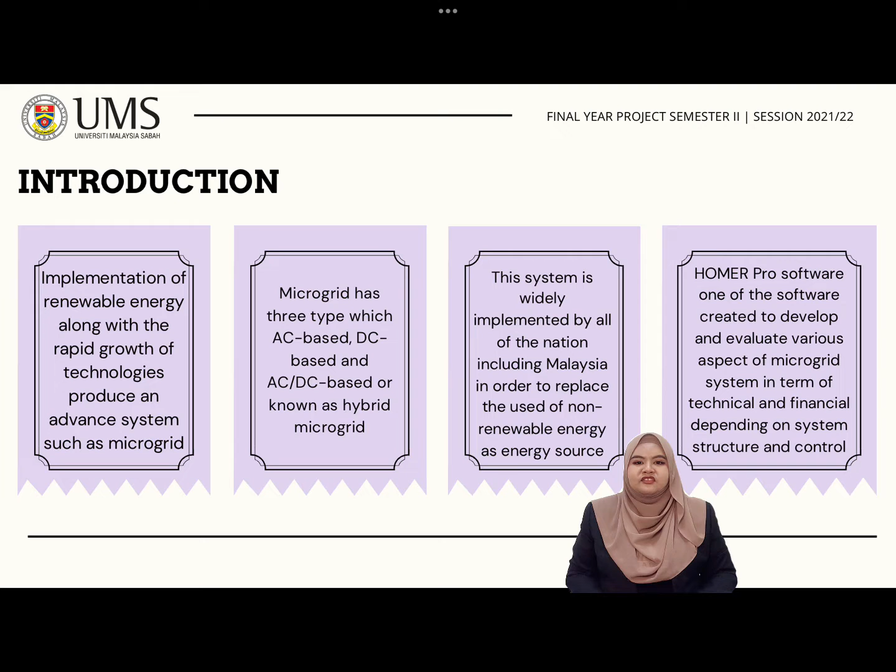HOMER Pro software is one of the software created by scientists to be used in developing and evaluating various aspects of a microgrid system in terms of financial and technical, depending on the system structure and control. The problem statement for this project is that the implementation of renewable energy such as solar, wind and biomass along with distributed energy devices is currently applied in numerous developing countries in order to replace current sources of electricity distribution. Since the microgrid is a self-contained electrical supply, this system is a popular topic discussed among scientists around the world.

The implementation can give benefits in terms of conservation of the environment and at the same time can reduce the maximum demand. For this project, the research location is at the Faculty of Medicine and Health Science, Universiti Malaysia Sabah. This study is purposely to investigate the possibility of implementing a hybrid microgrid system at the faculty, and if it is possible, what is the best fit configuration that can be applied.

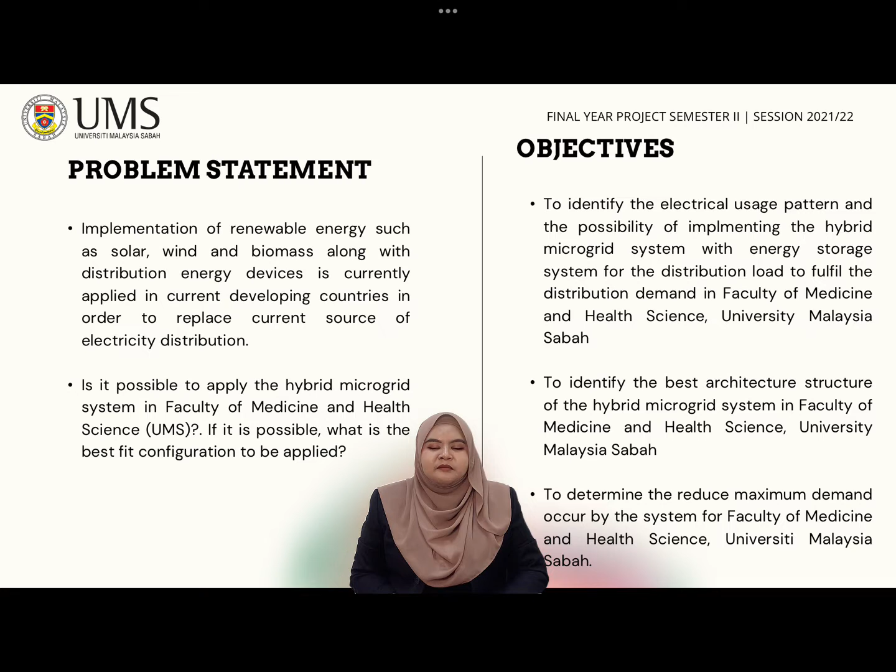The objectives for this project are, first, to identify the electrical usage pattern and possibility of implementing the hybrid microgrid system with energy storage system (ESS) for the distribution load to fulfill the electricity demand in the faculty. Secondly, to identify the best architecture structure of the hybrid system in the faculty. And lastly, to determine the reduced maximum demand achieved by the system for the faculty.

The literature review presents the overview of the research made in this project. As stated in the title, a framework is described as a basic structure underlying a system, concept or text. Thus, modeling a framework of a hybrid microgrid system is defined as constructing a connection configuration of the system with distributed energy resource units and devices. Other than that, an energy storage system is known as a device that functions to store the energy produced from renewable energy by another device.

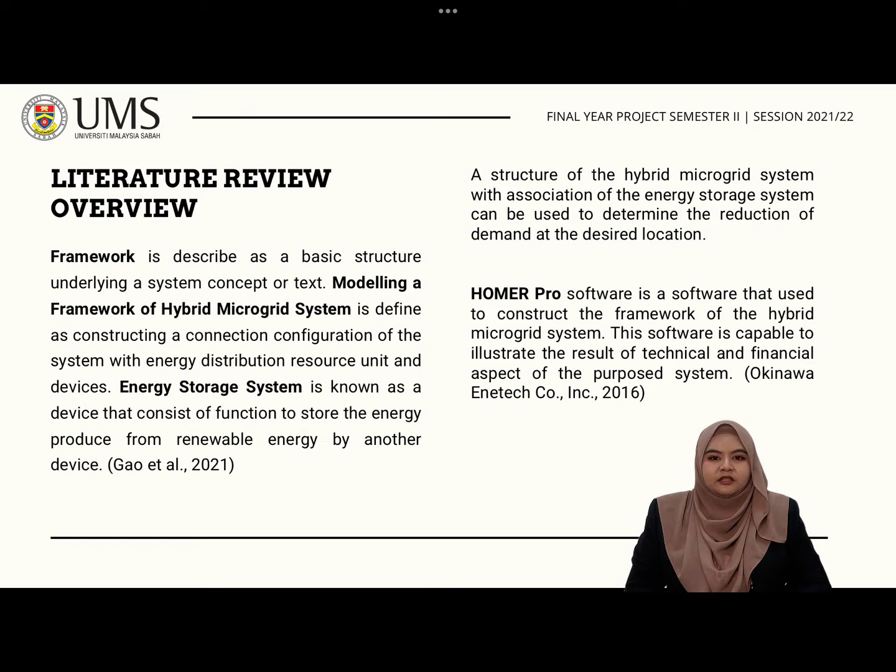Moreover, a structure of hybrid microgrid system in association with the energy storage system can be used to determine the reduction of demand at the desired location. In addition, HOMER Pro software is used to construct the framework of the system; this software is capable of illustrating the results from the simulation of the configuration in terms of technical and financial aspects of the designed system. Furthermore, maximum demand is defined as the highest level of electrical demand monitored in a particular period, usually a month. According to Tenaga Nasional Berhad, the higher the maximum demand, the higher the electricity bill charge.

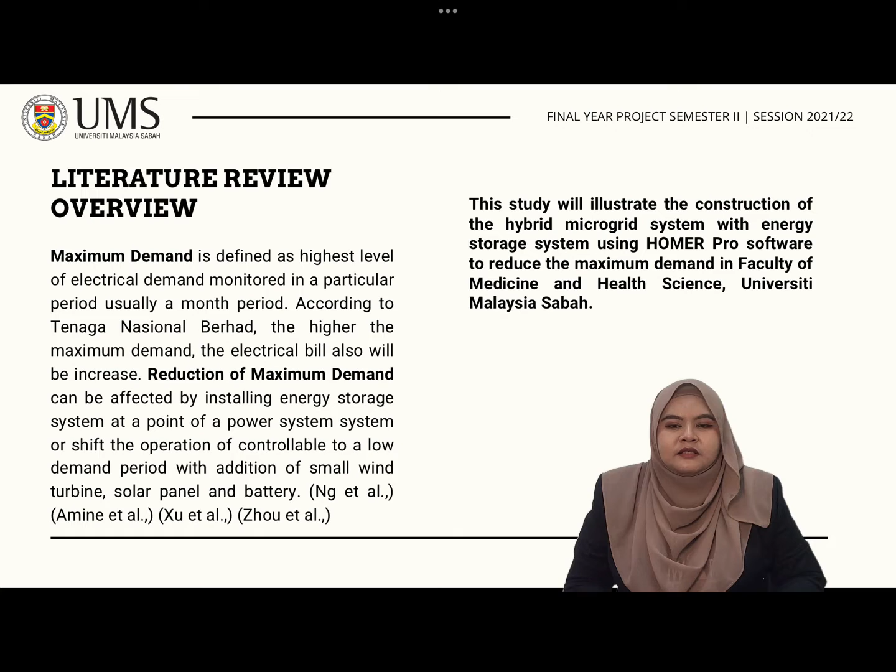Thus, the reduction of maximum demand can be achieved by installing an energy storage system at a point of the power system, or totally shifting the operation of controllable loads to a low demand period, with the addition of a small wind turbine, solar panel and battery as energy storage system. Hence, this study will illustrate the construction of the hybrid microgrid system with energy storage system using HOMER Pro software to reduce the maximum demand in the Faculty of Medicine and Health Science, Universiti Malaysia Sabah.

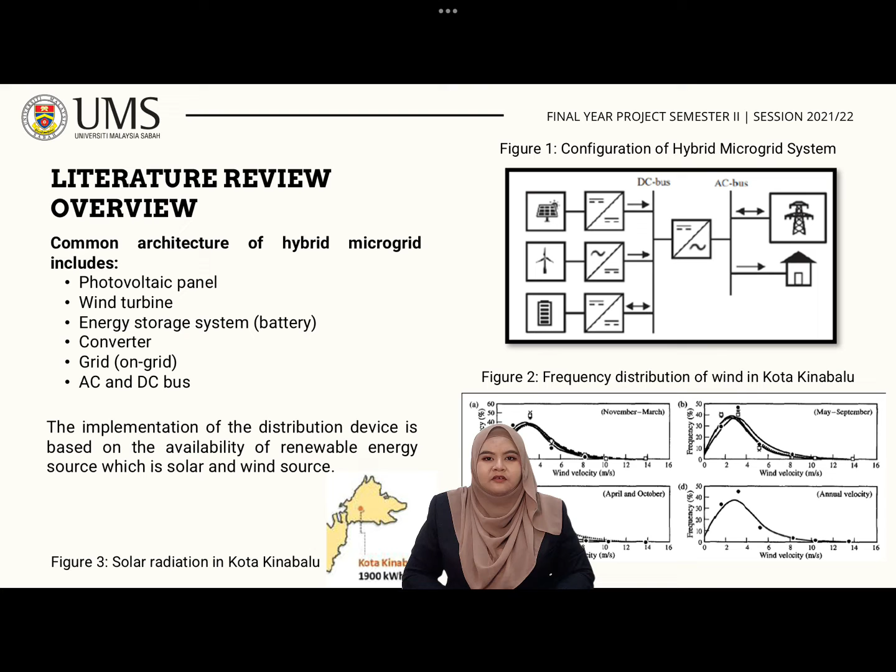For data collection, there are two sources of data: SESB, or Sabah Electricity Sdn Berhad, and the Faculty of Medicine and Health Science in Universiti Malaysia Sabah. The data gathered is in terms of the existing system in Sabah and electricity usage by the faculty to determine the pattern of usage. To collect this data, several site visits have been made to the faculty to take readings of the load usage using a data logger device.

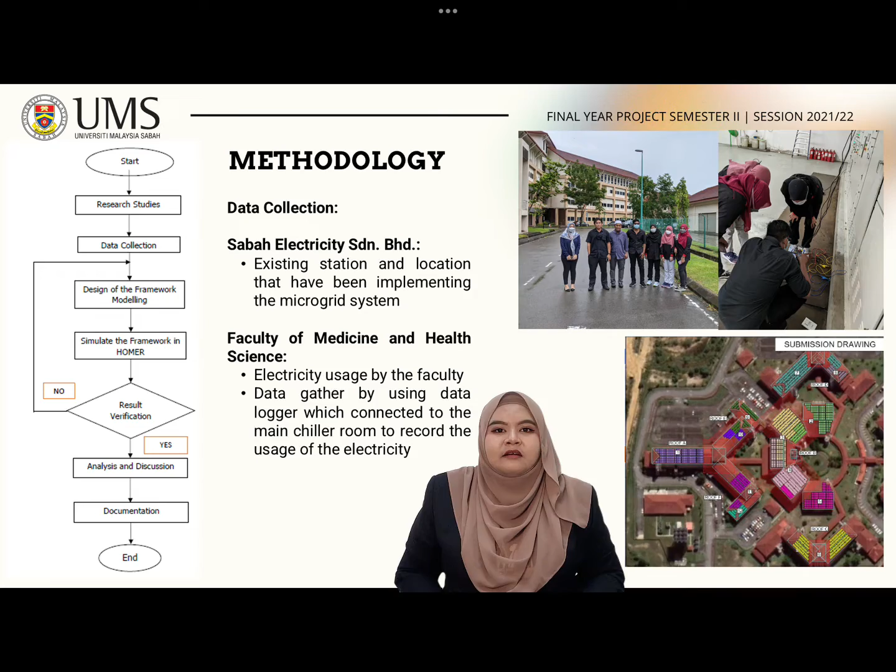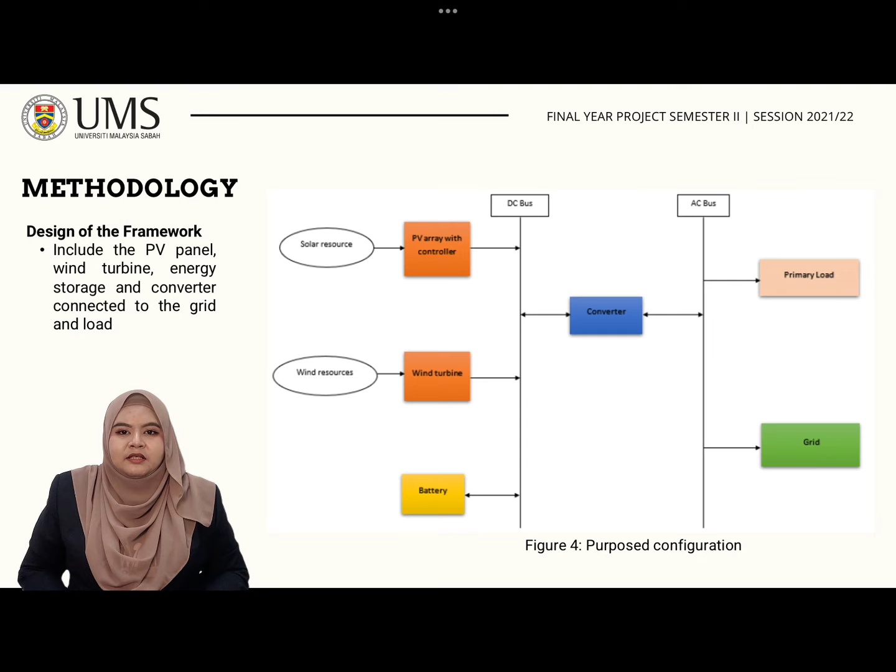Furthermore, the proposed framework of the configuration is as shown in the figure, which includes PV panel, wind turbine, energy storage, and converter connected to the grid and load. For the simulation part, the electrical load for the faculty has a yearly average of 2424.252 kWh per day with a peak load of 387.0455 kW.

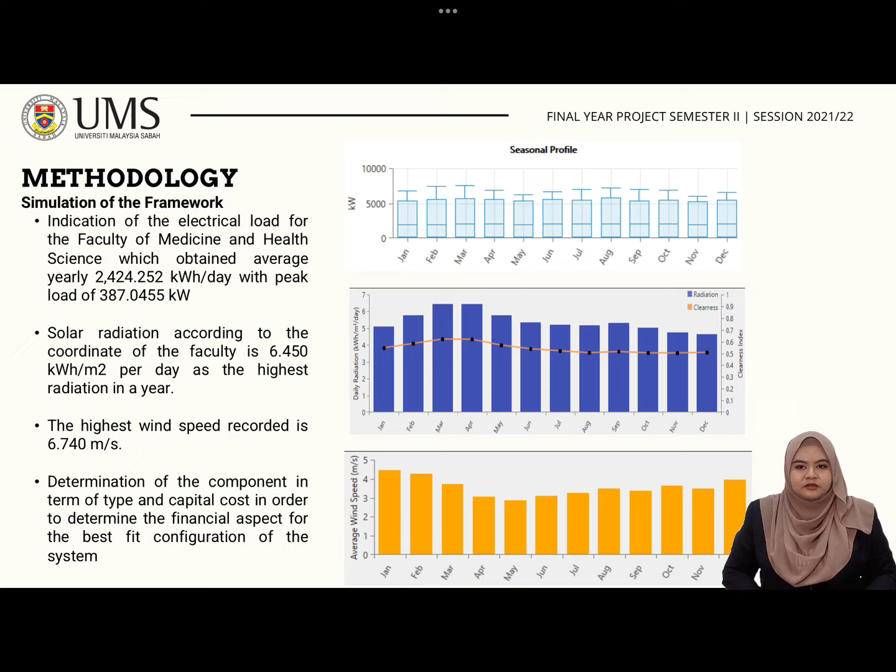Moreover, the solar radiation according to the coordinates of the faculty is about 6.450 kWh per meter square per day, which is the highest radiation in a year. For wind speed, the highest speed obtained is about 6.740 meters per second. Thus, to construct the system configuration, the selection of the components is made by choosing the type and capital cost before being applied into the system.

For result analysis, the figure shows the overall electrical usage pattern obtained from FPSK, recorded for 8 days. From the figure, the peak load can occur more than once in a day, depending on the usage of electricity by the faculty, and it usually occurs around 7:10 AM to 10 AM every day. However, data recorded for Sunday is 0, indicating zero usage of electricity for that day. From the distribution pattern, the maximum demand can be expected to be in the range of 300 kW to 500 kW per month, as the daily peak load is 400 to 500 kW per day.

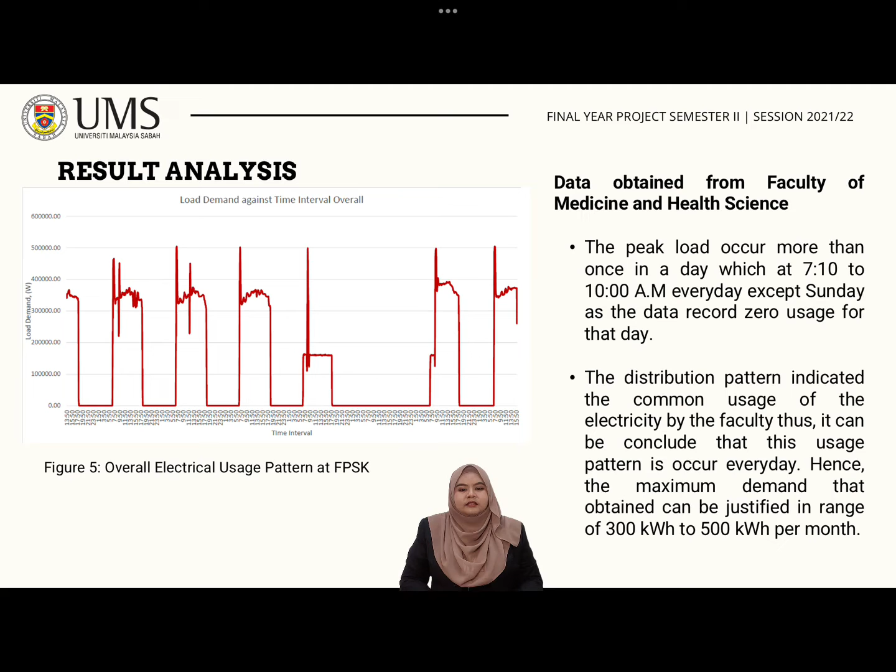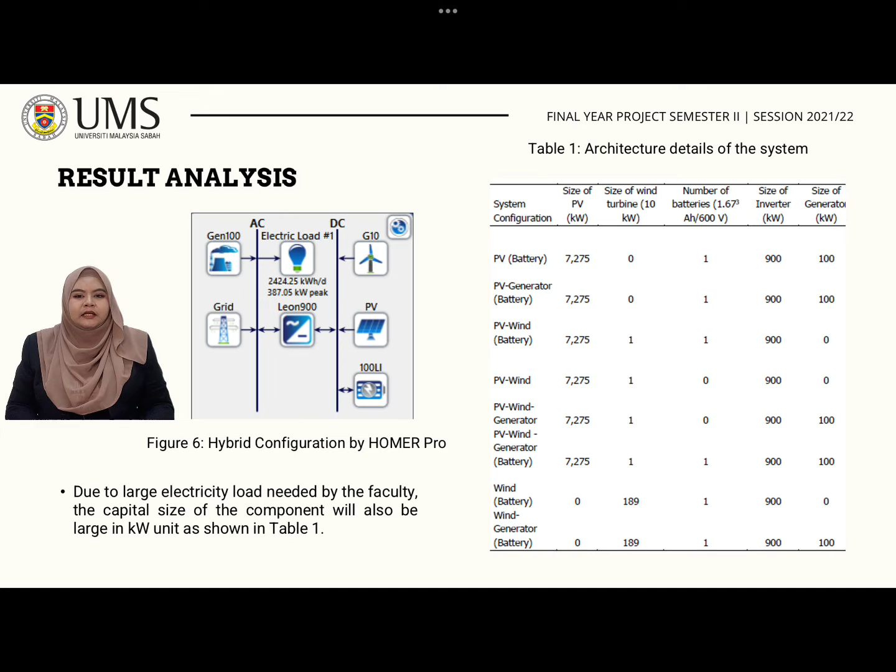Moreover, figure 6 shows the hybrid configuration system obtained from HOMER, resulting in the information shown in table 1. The size of the component depends on the load supplied: the higher the required load, the bigger the component, so it will be capable of supplying enough electricity to the building. Other than that, table 2 illustrates the cost analysis of the configuration. As shown, there are 8 optimized configurations which can be applied at the faculty.

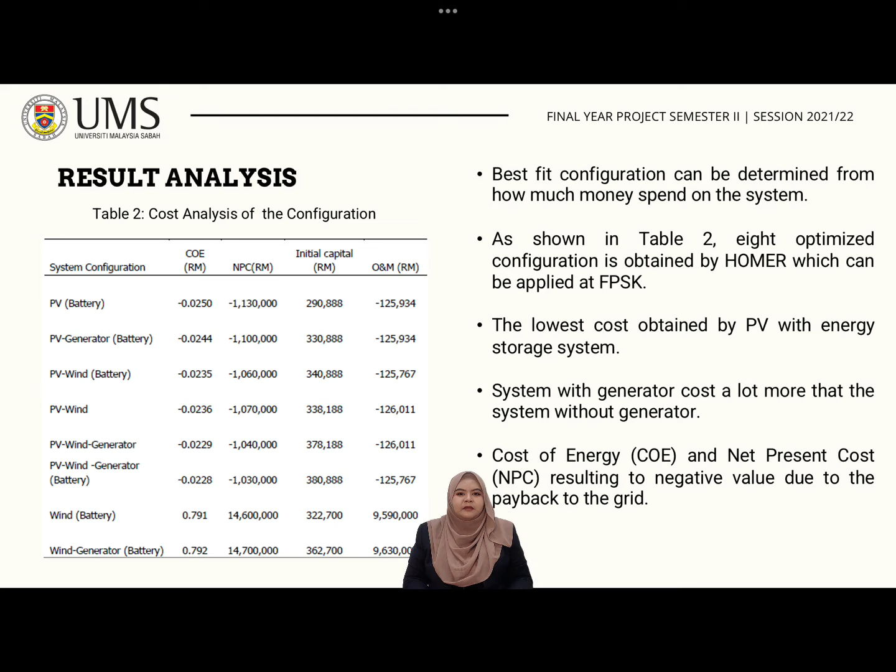There are numerous aspects that can be considered to choose the best fit configuration. From the table, the lowest cost is obtained by PV with energy storage system, which is RM 290,000. Aside from that, the system with a generator costs a lot more than the same system without a generator. The cost of energy and net present cost show negative values, which indicates that energy is paid back to the grid.

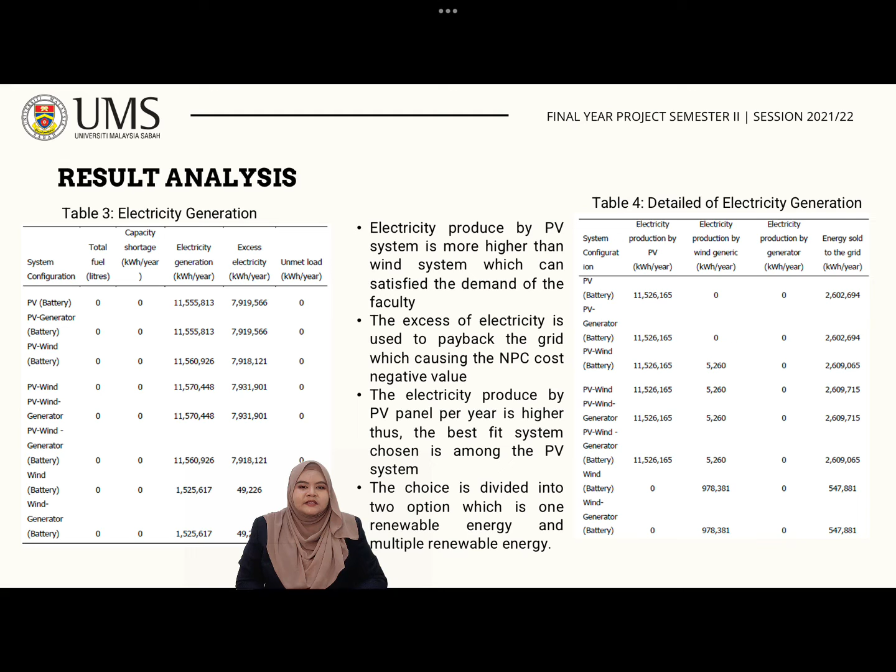From the configuration, the electricity generation by each system is shown in table 3 and table 4. Based on table 4, the PV system can produce about 11 gigawatt-hours per year, exceeding the load requirement of the faculty, about 3 gigawatt-hours per year, while the wind system can produce about 1 gigawatt-hour per year. The total fuel consumption shows no usage of fuel, indicating that the generator is not used in the system. Thus, the system with a generator is expensive due to the generator price only. The excess electricity will be sold back to the grid, resulting in the negative value in NPC costing. In table 4, the PV system overall produces more electricity than the wind system.

Thus, from the result, the best configuration is chosen in 2 categories: a system with one renewable energy source with energy storage, which is PV with battery, and a system with multiple energy sources with energy storage, which is PV wind with battery. As shown in tables 5 and 6, both systems can reduce maximum demand to below 250 kW per month, from the assumption of 300 kW to 500 kW per month.

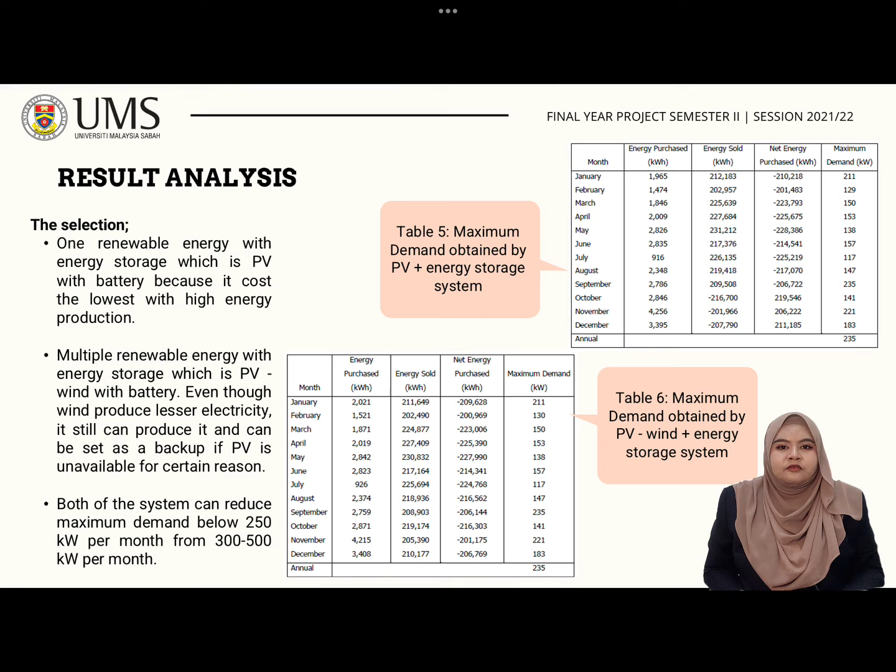In conclusion, all of the objectives are achieved for this project. The first objective is achieved by gathering the electricity usage data of the faculty and observing the pattern to determine the maximum demand and peak load during the recorded time. The second objective is to find the best fit configuration, achieved by determining two options: a system with single renewable energy and energy storage, which is PV with battery, and a system with multiple renewable energy and energy storage, which is PV wind and battery. The electricity generation for these two configurations is more than 3 gigawatt-hours per year, which is required to satisfy the load, so it is capable of satisfying the needs of the faculty. The third objective is achieved by determining the reduction of maximum demand by the chosen configuration, which is less than the assumed range of maximum demand faced by the faculty.

The limitation observed in this project is limited access to HOMER software, which needs to be purchased before use. The features of the software depend on the package; the more advanced the package, the more expensive it will be. Secondly, expansion of the research location: the location can be expanded to observe different patterns of electricity usage. Lastly, limited access to the recording device. In this project, the data is recorded using a data logger from an outside company, so it can be used once only. Access to this device can give more opportunities to recollect the data from the faculty to get a better pattern.